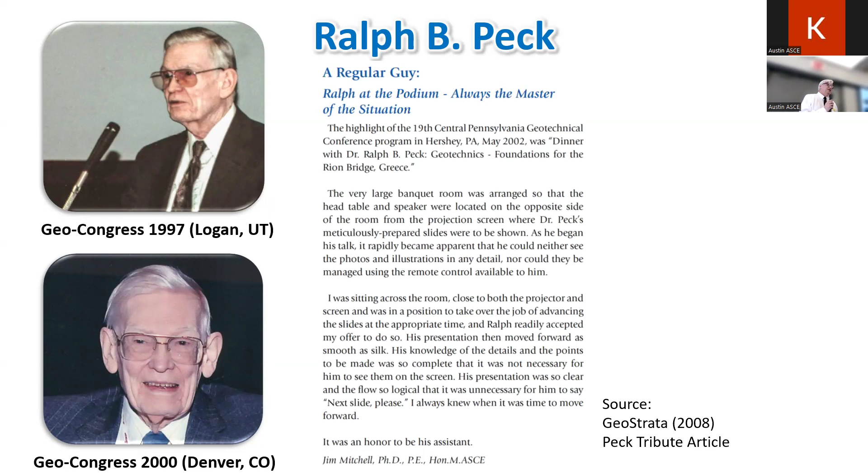In order to recognize Professor Peck, I thought that I would bring a recognition. I interacted with Professor Peck, but at conference level - I did not know him so much at the personal level. But there's someone else that I did know very well, who happened to be my Ph.D. advisor, and is another giant of the geotechnical profession - Professor Jim Mitchell.

I mentioned two events: 1997, which was my first Geo Congress, and 2000, a Congress in which I was somewhat an organizer. This is a different event I'm going to discuss - a 2002 event. I was not at that event, but Professor Mitchell was. Let me tell you what Professor Mitchell had to say about him.

A regular guy, Ralph at the podium, always the master of the situation. I'm reading it assuming that you cannot read it - the highlight of the 19th Central Pennsylvania Geotechnical Conference. That was an event as local as this, which is great, but it was in Central Pennsylvania - in Hershey. And the core of that event was dinner, actually dinner, not luncheon, with Ralph Peck.

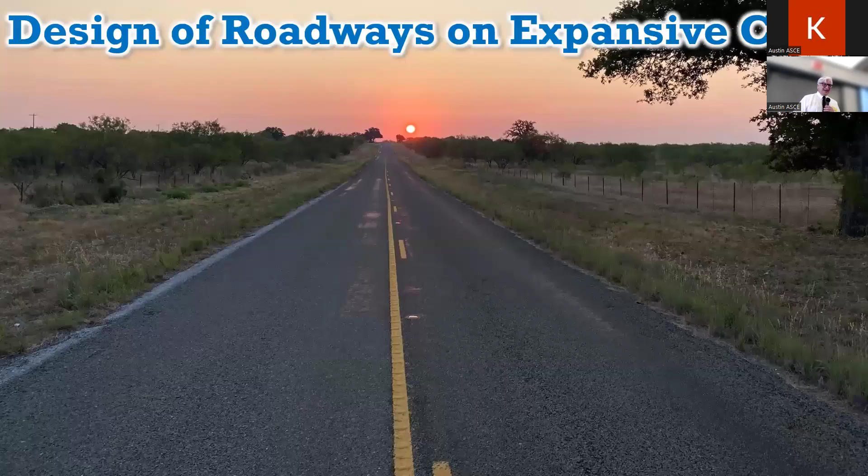And this is the most massive asset in the United States, public asset. We are talking about the total roadways in the US being 4.2 million miles. It's so significant that we may not have a sense of what this means. Just to have a sense, the circumference of the Earth around the equator is just 25,000 miles. So if you were to put all our roads one after the other and go around the equator, you will need to go 170 times in order to account for the massive asset that we need to build, maintain, and protect.

So it's a very massive asset, and any contribution that we can make to better the performance of this important asset will make a significant impact in our profession as civil engineers. So let me walk you through what we know very briefly about the direction that we're going in the design of roadways.

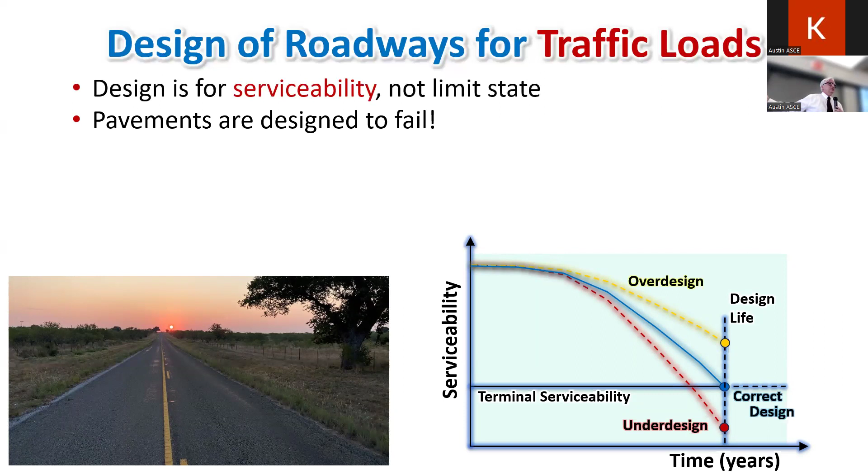For many years, and I'm not sure how many of you are familiar with the mechanistic empirical design, that's the direction in which we are moving in the design of roadways. But for a long time, this was such a complex problem that essentially we had to do a lot of empiricism to target this design. So let me tell you about the trend, the mechanistic empirical design, that is being implemented by AASHTO, and is being adopted by TxDOT.

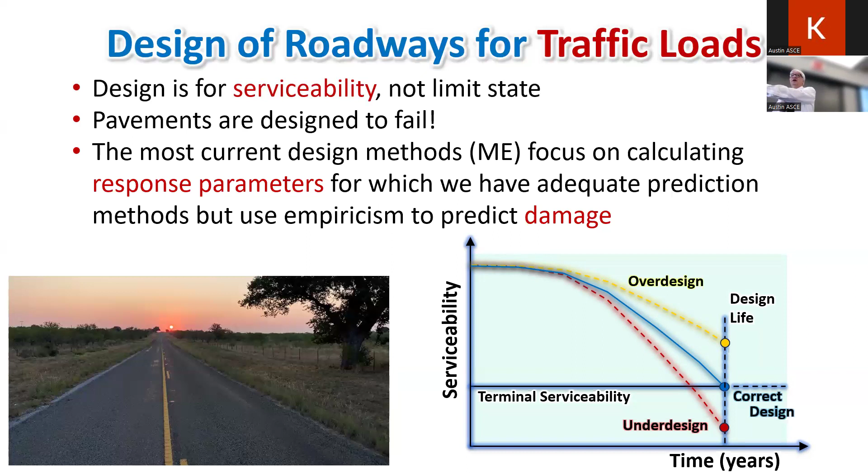The idea is the following: there are elements that we will not be able to predict, rutting is very difficult to predict, but there are elements that we can predict. We can predict stresses, we can predict some levels of deformation. So let's predict the parameters that we can predict, and then let's use empiricism, using certain thresholds on the stresses and deflections that we can calculate, as a threshold to calculate the distress, the damage. So that's the basis of the mechanistic empirical design.

So just to put it in a cartoon: you're going to have the traffic loads, these are repeated loads, these are cyclic loads, and we are going to define elements. There are some parameters, some responses that we can predict. We do not design for the tensile stress at the bottom of the asphaltic layer, but we can calculate that. We can calculate the compressive loads or the deflection at the top of the subgrade.

So with the elements that we can calculate, that's the mechanistic component of our design. Then that's when we come back with empiricism to translate, and this has a formal process that requires field data, called transfer functions. We use the transfer functions to transform that level of stresses beyond a certain threshold to a certain damage. And we're designing for damage. So ultimately, the accumulation of these responses, this damage accumulation, is what defines the distress. And this is what we do not want to see in a road.

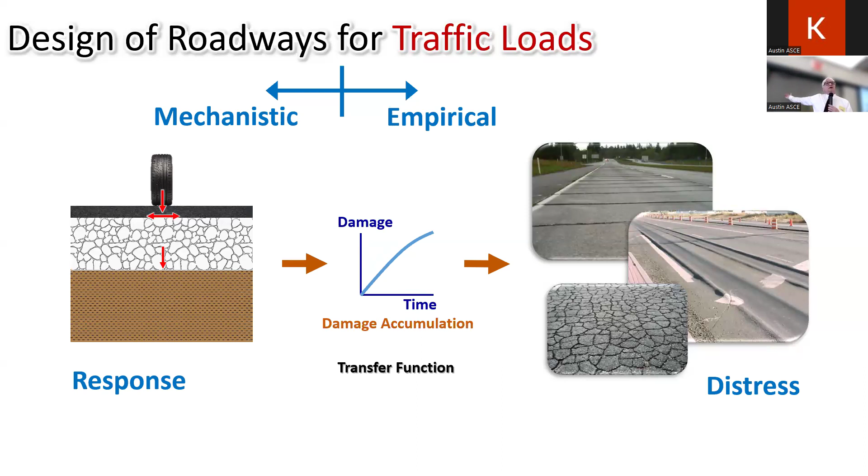And this is very hard to predict, but you can do a better job. So if we put reasonable thresholds on the stresses and deflections, we use that to empirically come up with the distress. Ultimately, we close the loop, and this distress, if we do a good job, is going to be used to recalibrate the design thresholds.

So it's a closed loop, and this is the basis for the mechanistic empirical design of roadways, which is not formally the observational method of Professor Peck, but I would contend that it has many of the elements of this observational approach. But that was traffic loads, and we know a lot about this, and we're moving in this direction.

What about environmental loads? In expansive clay, we're going to see that the distress we achieve may have nothing to do with traffic loads. This is a fingerprint of the failure by serviceability that occurs if my road is on expansive clay.

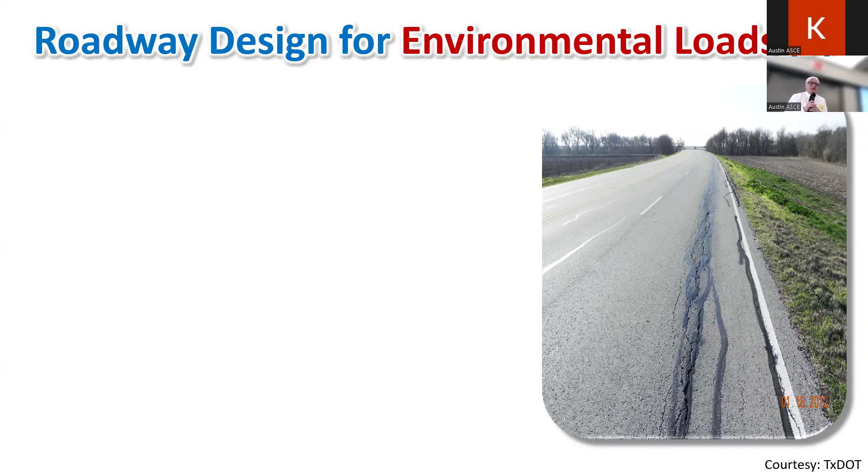If you drive here to East Austin, you're going to see a lot of this. And none of them have anything to do with traffic loads. These are different loads, and the current framework for designing roads doesn't help us. Here's another one. And here's another one.

So how do we design for this? Because this has nothing to do with my traffic. And for my roads, I know how to design for traffic. So we need something different.

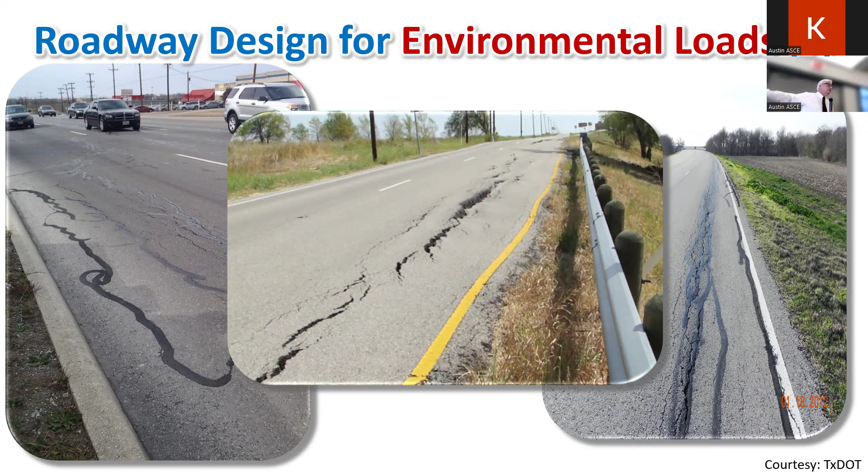So we do not have little trouble with this, we have a lot, even though it has taken a while for us to recognize it. This is a very old problem. We know about this. We have been dealing with this because a lot of the US has a significant fraction of expansive clay. We may not have known what is the cause of the distress, but we know.

Now it's too late to change our location, so now we need to handle it as it is. And we need to start by recognizing what is the mechanism by which these failures occur.

The original thinking was that, well, this is expansive clay cracking. So these humongous cracks are probably developing in the subgrade, and we do not see them, and they're longitudinal, and eventually they propagate to the surface. No, that's not what happens. We need to understand the mechanism in order to understand how to solve the problem.

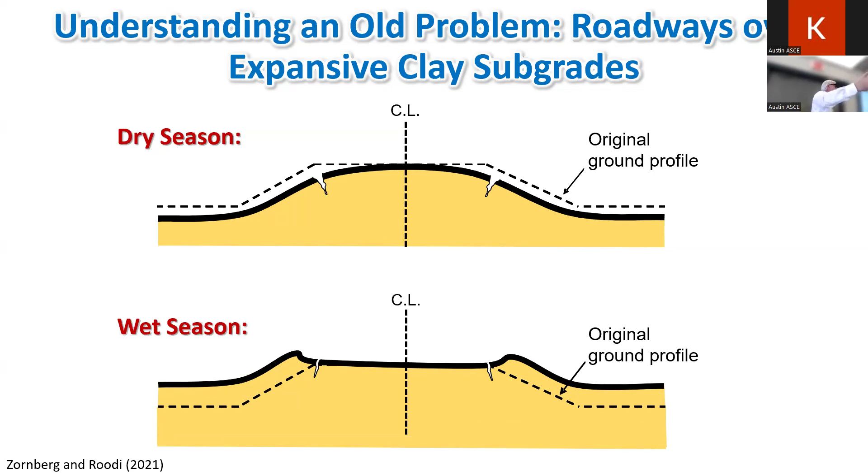During the wet season, the shoulders will heave in relation to this, and the cracks may even close. So it may have been a quarter of an inch and may become a tenth of an inch, but the crack is already there. And the problem is once the crack is there, water infiltrates and the degradation mechanisms have already started.

And if you don't believe it, because this was logical, but we didn't have data, so we collected data. This is Turnersville Road here in East Austin. You see the longitudinal cracks, and you can see the posts tilting, so this is currently rising. But if we go and measure - and some here in the audience may have even taken some measurements here.

So if we go and measure, not on any particular extreme date, this was okay. But it's often that we gradually see this when we go and measure the cross section from 2015 to 2018 - just the changes in elevation of the shoulders in relation to the center line. We're talking about, again, no particular extreme dry or wet event, just an inch or so. These are over 30 millimeters, just randomly measuring the relative elevation of the shoulders in relation to this, within the width of a single lane.

So now, this is just roadways, but this is not an exception. With data coming from insurance companies - this is mainly your window that doesn't close, or your door that doesn't open, or the crack in your ceiling - coming from insurance claims, the costs associated with expansive clays in the US exceed 15 billion dollars a year. This is not life-threatening, that's true, but it's more than any other geohazard - tornadoes, floodings, and earthquakes combined - on a yearly basis. This is a massive resource we need to cope with because we're not handling the expansive clay approach properly.

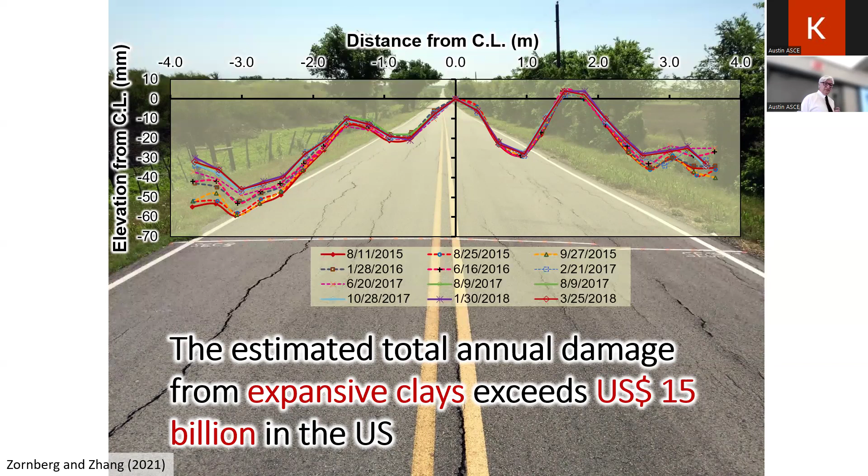If you don't believe me, this is not going to get any better. I don't have what happened in 2023, but I looked at data from NOAA, through the National Center for Environmental Information. They collect, on a yearly basis, the number of events whose damages exceed $1 billion. This is an infamous list - the list of $1 billion weather disasters every year. They have special considerations on the type of investigation for each disaster. This started in 1980, so they have 44 years of data, and the 6 represented here are the top 6.

Let's see where we are in 2023. We topped the chart of the last 43 years. We had 28 natural disasters whose cost exceeded $1 billion, and this is over 44 years. But I can see 2022 also makes the top 6, and 2021 is also there, and 2020 is also there. So out of the last 44 years, the last 4 or 5 years are the top 6.

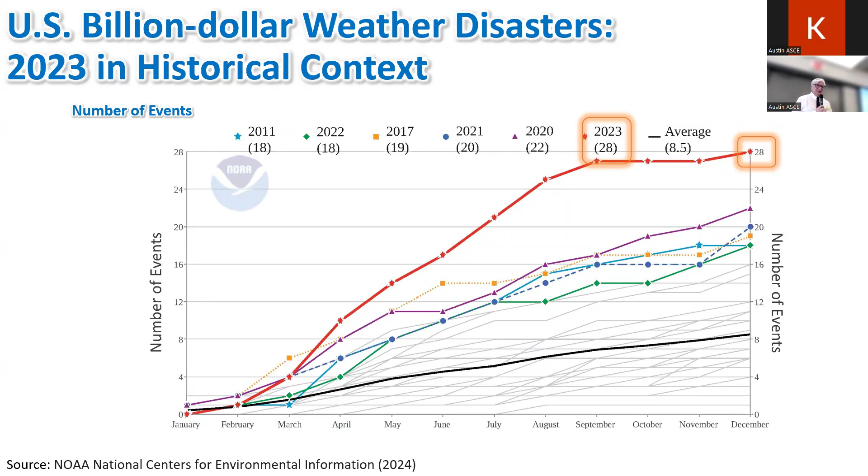So this is not telling me that we're going to get any better with weather-related disasters. Indeed, if you want to know, adding only the $1 billion disasters - the 28 events that each exceeded $1 billion - I think it's in the order of $81 billion for 2023. And again, this is data released last month. The worst one was the heat wave in 2023, $14.5 billion, and this doesn't include our roads, this doesn't include your home.

This is mainly disasters and costs associated mainly with agricultural and water issues. So this is not going to get any better. This is the list of water-related, drought-related disasters, and here is 2023, $14.5 billion. Again, this doesn't include our roads, but I thought this data would tell us that this is not going to get any better anytime soon.

So with this, the professor and I may ask you a couple of questions. Question one, and I may have given this away already: what mechanism is responsible for the distress in roadways on expansive clays?

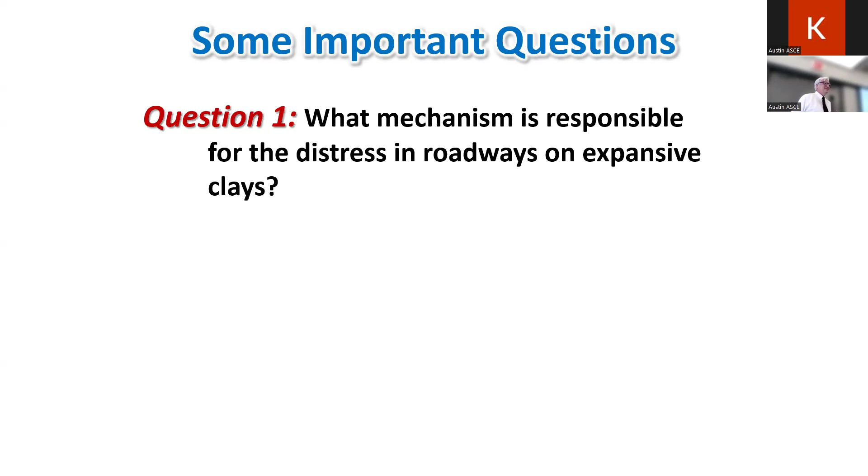Shrink swell, yes. Is it because there is a humongous crack in the subgrade that propagates to the top? No, correct. It is because there is a differential vertical movement caused by moisture fluctuations.

Okay, let me give you a second question. Are practical methods available for roadway design to characterize, not to solve, but to characterize expansive clay sites? I want to know if I have a problem with this site. Again, I haven't given this up yet, but what do you think based on your understanding? Do we have practical methods, or maybe just research, to identify where these $15 billion... how to characterize if we have a problem that will contribute to the next $15 billion a year?

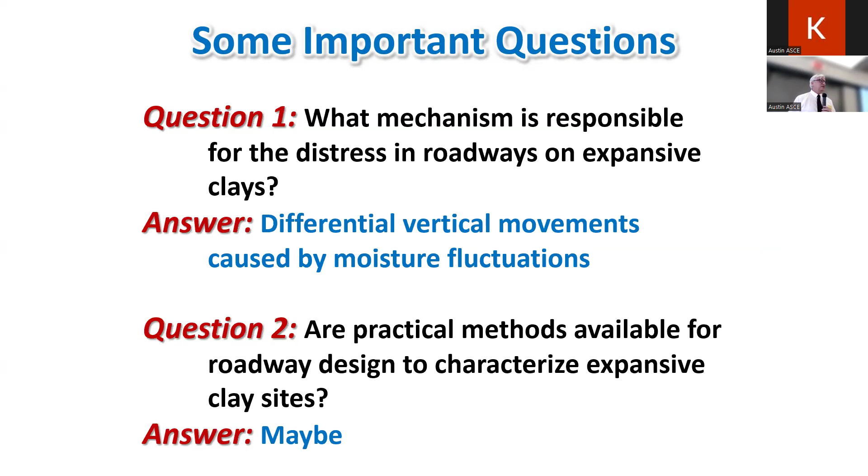What methods do it? Are you familiar with that? Which one? Texas PVR. I would contend that that's in the right direction. I'm going to give it a maybe, but I'm going to be hopeful, because that's going to be at the heart of what I'm going to tell you next. Yes, and the direction is Texas PVR, at least in that direction.

So let's start with characterizing the problem, and let me walk you through what we need to do to understand this problem of expansive clays. So really what's going on here, the culprit is the mineralogy of our clays. This is the Eagle Ford clay that we have from Dallas.

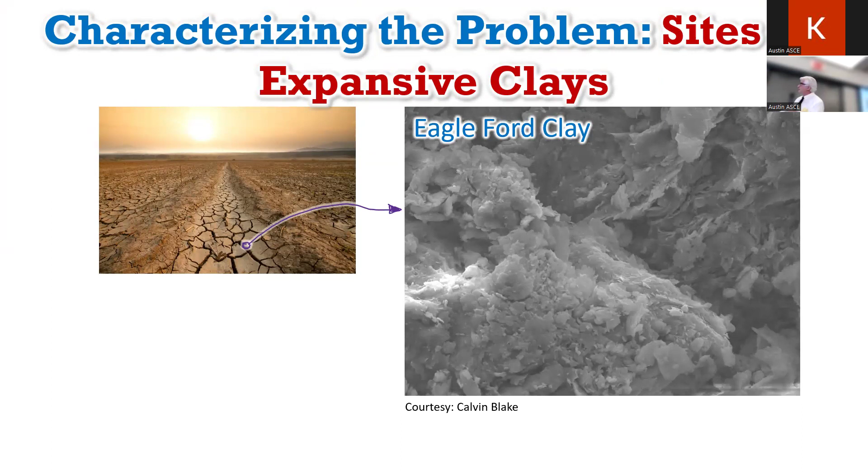And maybe it is a microscope image. Many would attribute the fact that this is an expansive clay because these are tiny particles, and that's partly true. But the real reason this is an expansive clay is because they are negatively charged. There is a geologic process called isomorphous substitution that makes these clays negatively charged. And actually, this electron microscope image doesn't do it justice, because it's very hard to get an electron microscope image of a clay with water.

We do not have the techniques, they're very difficult, but this is the gooey thing that you get when that clay gets water. And I'm going to try your memory, maybe if you get into grad school in geotech, there is an explanation for this, there is a theory for this. And this is the theory of the diffuse double layer. That's okay if you didn't get to that chapter in your undergrad, but this is the idea.

If this is a clay particle, it's negatively charged, and here we have pore water. The pore water is an electrolyte in equilibrium, with cations and anions that are in equilibrium with each other, but far away from this negatively charged surface. So what happens is that when our electrolyte gets closer to that surface, essentially the cations, the positively charged sodium, calcium, magnesium, will be attracted to this surface, and the anions will stay far away. And that's fine, this is what we call the diffuse double layer. There's a theory for that.

The problem is that not only does the diffuse double layer expand and develop when we have this negatively charged surface, but it also depends on the availability of water. If water evaporates, essentially we're not giving the opportunity for these cations to stay as far away from the clay surface as they want. And literally what we're doing is spring loading with water, essentially the surface right next to the clay.

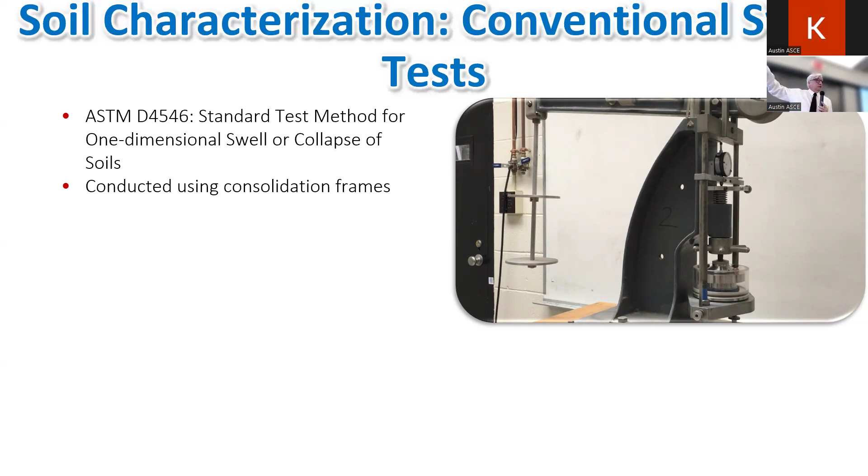We're going to start with an unsaturated soil, and we're going to add load, and we're going to measure how much it swells. We're going to measure the swelling potential for a given load, for a given confinement, we measure the swelling potential of the clay.

Are we doing this? We have the capabilities. It's an ASTM standard. Do we do it? Any one of these? Who mentioned PVR? Have you ever done this, a swelling test? You did? How do you use it? Well, we'll talk. But in my experience, it exists.

We don't do it. The reason that we do not do it is because it takes a long time, and it's very expensive. And if I'm going to characterize a new project, I need to do this with borings every 500 feet. Who's going to do this? So we don't do it.

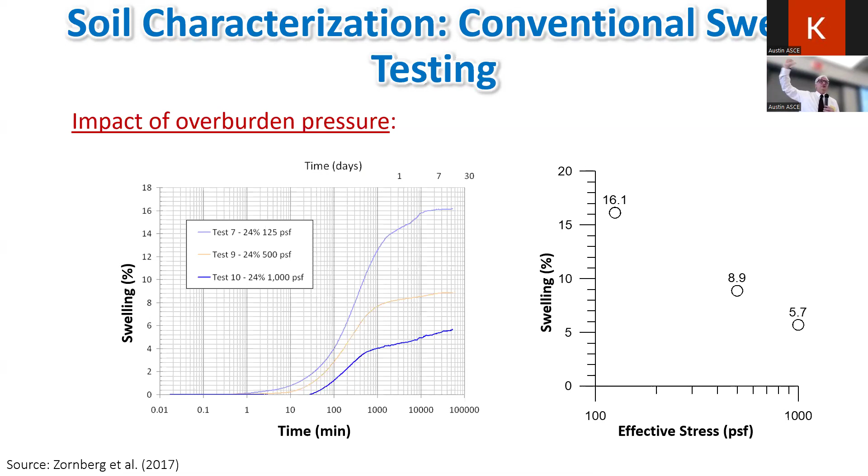The idea is that if we have a boring or a profile, let's say here is 2, 4, 6, 8 feet deep. Most of the action is going to take place close to the surface. So how much, if these top 2 feet go from the initial moisture content, let's say reasonably dry, to saturation, how much contribution, what is the potential rise?

I showed you data that shows the rise of the shoulders in relation to the center line. This is the potential, because not necessarily there's going to be a flood. So not necessarily we're going to take the soil in practice to saturation, but as a potential, as an index.

I like the term performance index. As a performance index, what is the potential that the top 2 feet can contribute? Let's measure. What is the potential that the second 2 feet can? Let's do this for the third 2 feet, and the fourth. For the same change in moisture, the bottom 2 feet contribute much less than the top 2 feet. That has to do with the confinement.

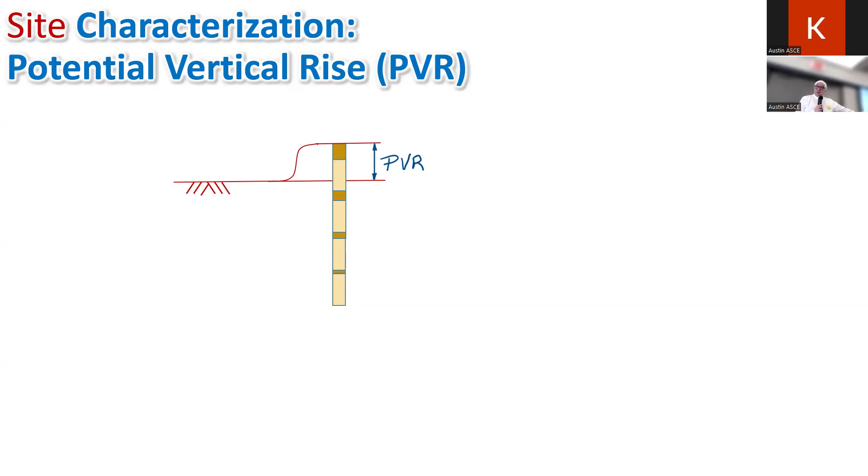And this is the PVR. What we measure is: if the soil profile is not one clay, but an entire profile, goes from a reasonably dry condition to saturation, how much is my ground going to lift? And that's the potential vertical rise, an important parameter.

And so here it is. This is the contribution of each one of the top 2 feet, the second 2 feet, the third, the fourth. We measure the swelling versus depth. Does this account for all variables? Not for all, but for many very important variables.

What is the area of this curve? Really, if we increase the number of these spaces, more, that's going to be the area of that curve, and that is my PVR.

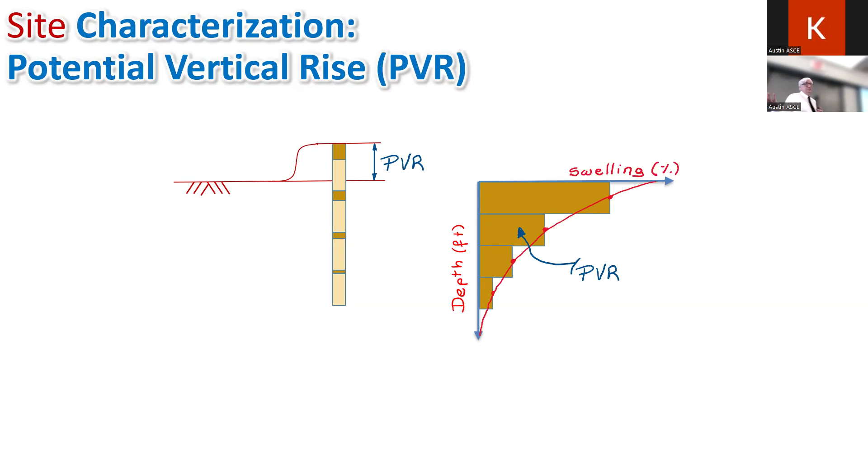But this is very relevant because it tells me a lot about the soil characteristics. It tells me a lot, I need to know the stratigraphy. It tells me a lot about the initial moisture content, I take that into consideration. I also take into consideration the very important impact of effective stresses, of the confinement, in getting this.

But it doesn't take into consideration everything. Most importantly, if we really rotate this, this is the swell stress curve that we just quoted. So really what the PVR is, because depth relates to confinement, mathematically or theoretically, is really the area under the swell stress curve. If we have that from the lab, we're done to calculate the PVR. We can do a good job calculating the PVR if we have the data.

This comes directly from the pavement design manual in TxDOT. It tells us this seems to be a right parameter. So let's design essentially what it says here, that our highways need to be designed to a PVR that doesn't exceed 1.5 inches. That doesn't mean 1.5 inches is going to occur. It means this is a good performance index that, as a design criterion, I shall not exceed.

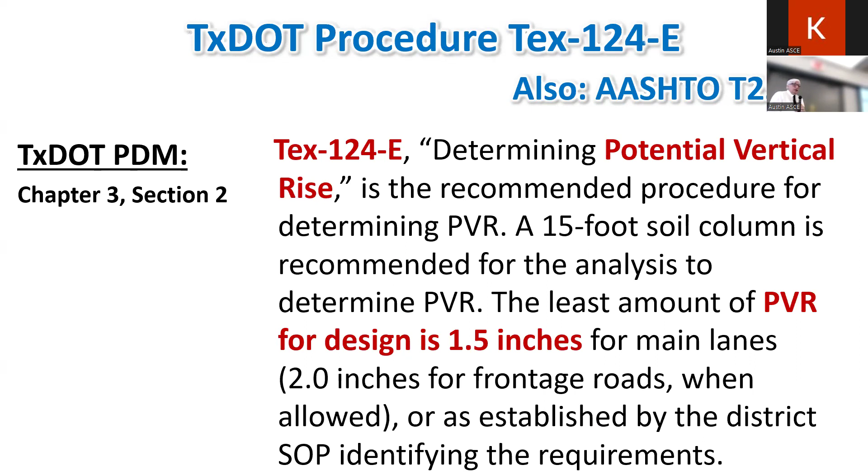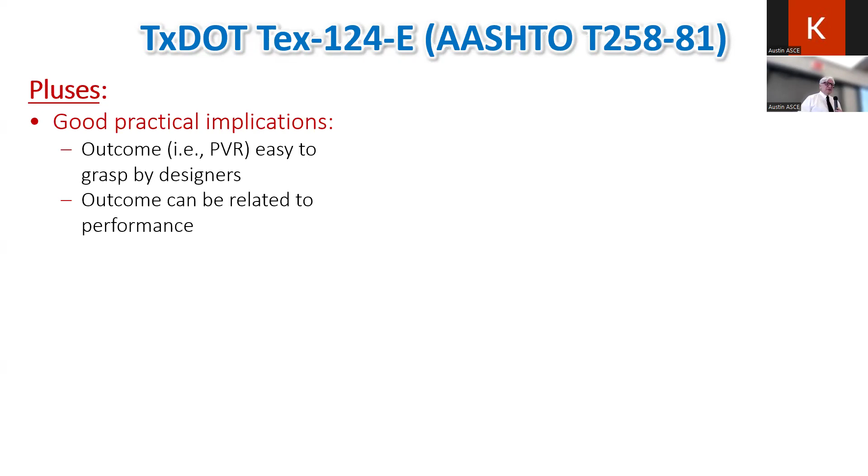All right, it sounds all good. There are many good reasons, and by the way, this was adopted by AASHTO, which is a very difficult thing to achieve. So there are very good reasons to endorse this PVR approach. The outcome is easy to understand, it can be related to performance, and it accounts for the right variables - not all the relevant variables, but many very important ones are accounted for in this PVR. But it has some problems.

The problem is that we didn't do the tests. Swelling tests were done in the 1960s. And when we realized that no one is going to continue doing these tests, we said, well, let's correlate the swelling, the PVR, to something that our engineers are going to do. And there came the plasticity index. But the plasticity index is not the PVR - the plasticity index is used to correlate with the PVR.

Oh, but we need 1, 2, 3, 4, 5 corrections. This is a very simple test, the simplest you can think of to characterize a clay, and you apply six corrections and you get to the PVR. So I'm going to contend that if you're familiar with the PVR as we use it today, you get this TxDOT spreadsheet, you plug in the numbers - the PI, the plasticity index - and you get the PVR. What you're getting is correlations with plasticity index from tests done in the 60s with corrections, and that's how you're going to make a multi-million-dollar decision.

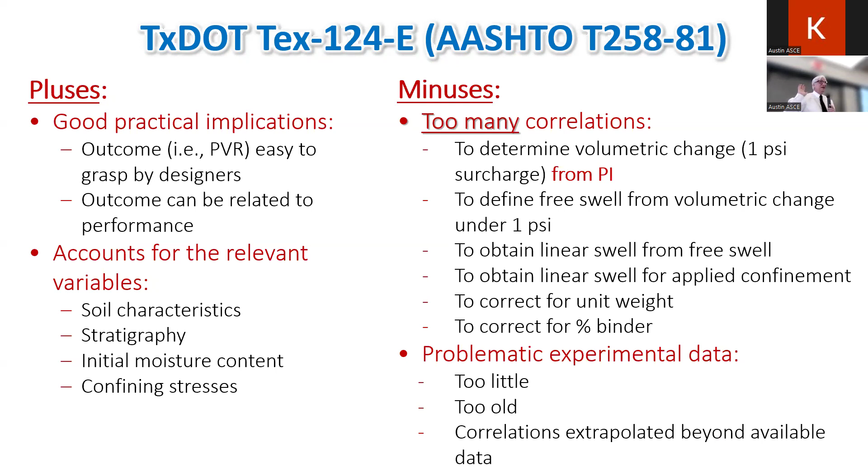Essentially, this is the data from the 1960s that correlates the volumetric swelling and shrinkage against the plasticity index. In order to get this, you need an initial moisture content, so that's why you see several curves, dry and wet. Many data points I have from the 60s - all this comes from some sites in San Antonio. To get the dry condition that you choose, it comes from like 10 points. How many for the wet? Six.

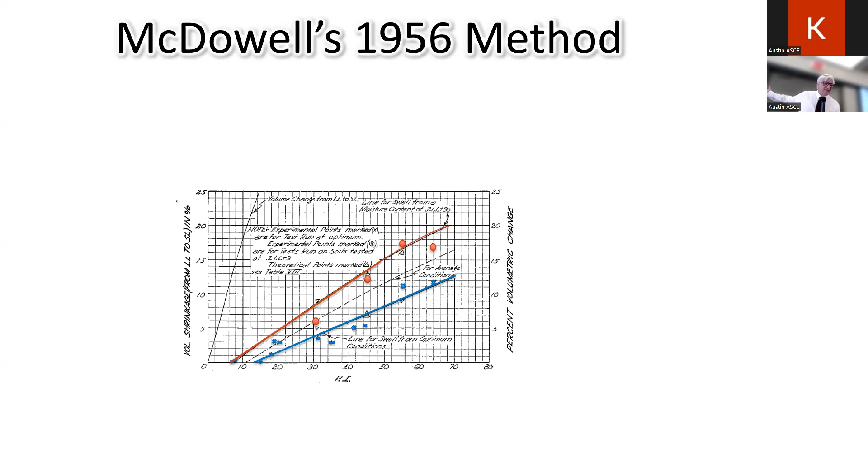That's how we are using it, and this is not all. This doesn't have confinement - this is for a 1 PSI confinement. But we really need PIs - here are PIs, we need more plasticity index that may increase. Oh, we do not have data, but we have already identified the trend. So this is where your spreadsheet is coming from. But that's not it.

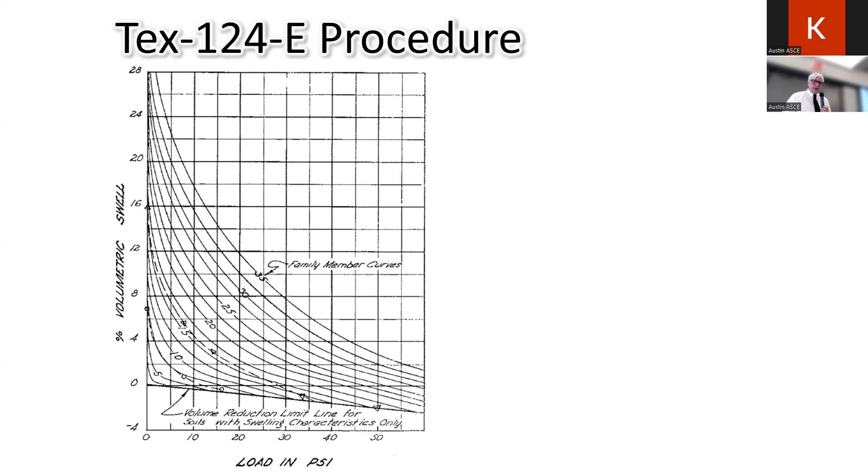Because this was for one PSI confinement, but we need this for different levels of confinement. So this is essentially the data collected - 1, 2, 3, 4, 5 data points - to get the entire set. Now we're talking about functions, not one number, an entire function that gives me the swelling versus confinement. That's where the data comes from. Really, the PVR equation uses it in a different way. This is what you get - they don't even show you the data because the data is very little to see.

So, good concept, relevant variables. But I wouldn't be surprised if you tell me you don't see much correlation between distress and the plasticity index, because this is a very simplistic initial evaluation with very little data. But the problem is real. To augment this database, well, we need a lot of time and money, and I'm going to do that for my product.

So that's when the research came about - reasonably recently, but I'm talking about now a decade ago.

We have been accelerating the swelling tests. If you do an infiltration test and want to accelerate the infiltration of water into your soil, recall how we do a hydraulic conductivity test. We put the specimen in a cell, and we need to test a clay. It will take a month to give me the hydraulic conductivity, and it may take a month to get the swell. So what you do is you accelerate it.

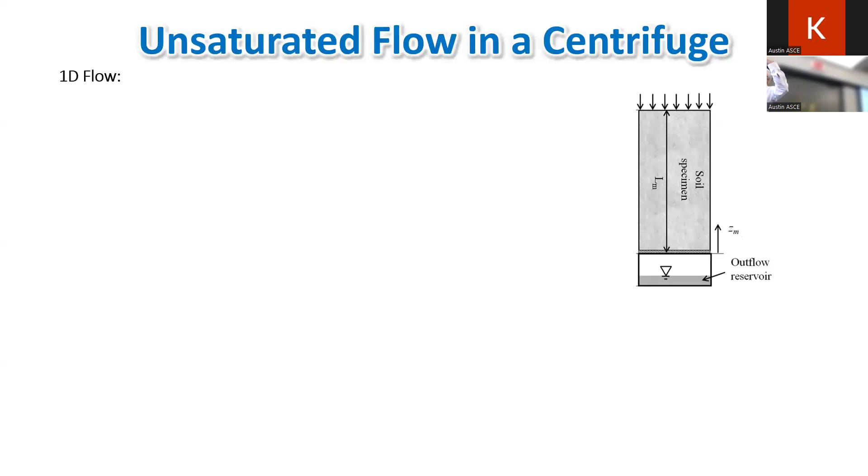The way you do it is you increase the gradient, the hydraulic gradient, by adding differential pressure. But that's doable with saturated clays, and that's what we do to measure the saturated hydraulic conductivity. It's much harder to do that infiltration, a gradient in pressure, in an unsaturated soil, because now the pressure is negative, it's suction. To put a gradient in negative pressure is very, very difficult.

Let me remind you what you learned the first time you saw Darcy's law. The hydraulic head has two components: the elevation head, Z, and the pressure head. Typically you would have seen U here; I'm putting it as psi to indicate that this pressure is negative. Under unsaturated conditions, there is water pressure, but that pressure is negative. What drives the flow is the gradient. This is energy, energy per unit weight, with units of length. What we really need is a gradient in hydraulic head.

If we derive the two components of the hydraulic head, it's 1 plus the gradient in psi. That's the hydraulic gradient, and we use Darcy's law. With Darcy's law we have the hydraulic conductivity, which in saturated conditions is a number, but in unsaturated conditions is a function. So here's the hydraulic conductivity times the gradient. In our testing on a saturated soil, we mess with this to increase the gradient, to get a test that would take 2 months to give us a data point in 1 day, hopefully. But under unsaturated conditions, we cannot. It's very hard to impose these gradients in psi.

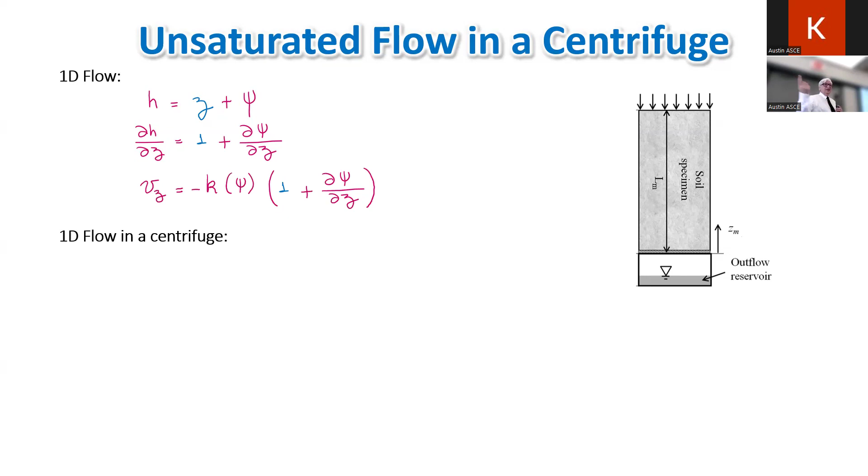So what about if we change this number 1? Can we change this? Yes, we can, because really this is a normalized potential energy. It comes from the gravitational energy that changes from one elevation to another, normalized into a difference in elevations. So if we put this permeameter in a centrifuge, we accelerate the number of gravities that we're subjecting it to.

So we can really change that number 1 to a number 10. We have 10 times acceleration, right? The acceleration corresponding to 10 times, to 50, to 100, maybe 500. So now we're talking - now we can accelerate the infiltration, and that's what we did at the University of Texas at Austin. We have a geotechnical centrifuge in which we can accelerate the flow process by increasing this gravitational potential.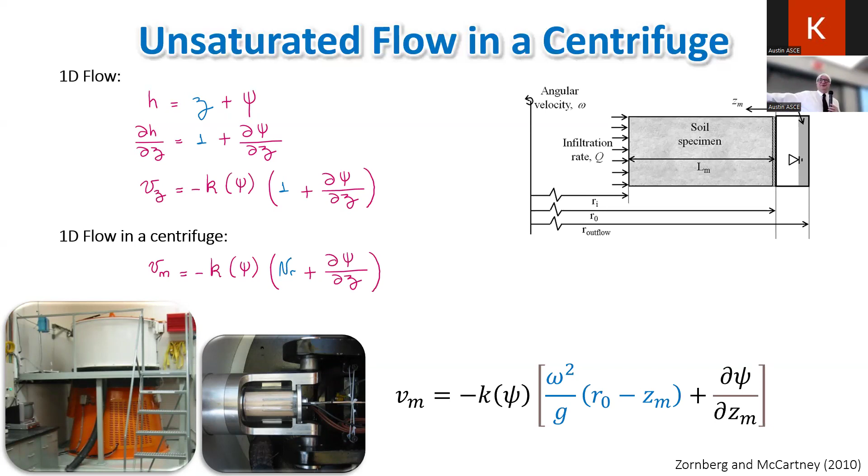At the end, Texas DOT was interested. We were very interested in modeling flow problems, but they said no, just give me the swelling. Well, if you want just the swelling, we can use equipment that is much simpler - essentially something like a medical centrifuge. I won't get into this, but the reason it was developed was to directly measure an important unsaturated property, something no one can measure otherwise. That's why in unsaturated flow we usually just guess what that function is - we don't measure it. But we can measure it in the centrifuge.

So Texas DOT said, well, you can also accelerate the infiltration that it takes to get the swelling. And for that we do not need this big centrifuge, we do not need to measure moisture, and we do not need to impose flux - we just need to measure volume changes. We can do that in a smaller centrifuge, and by the way, this one is the size of a washing machine.

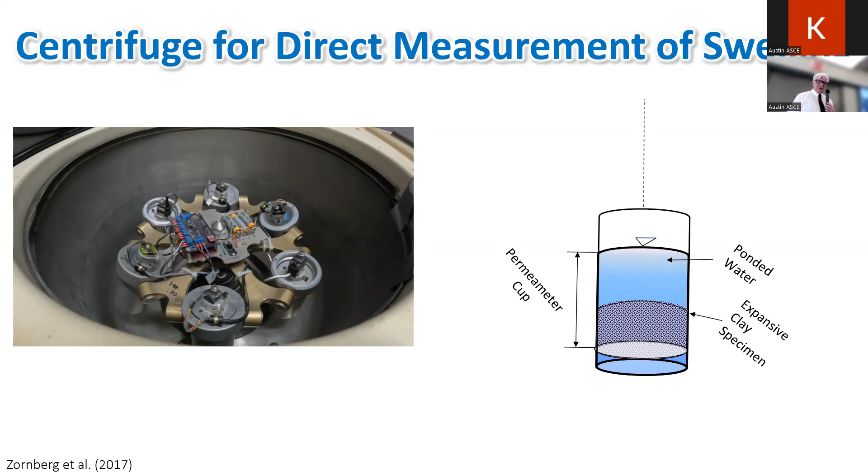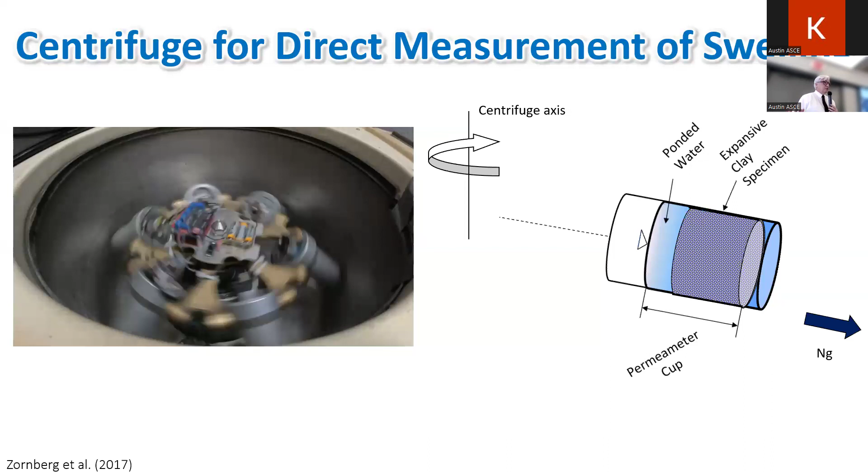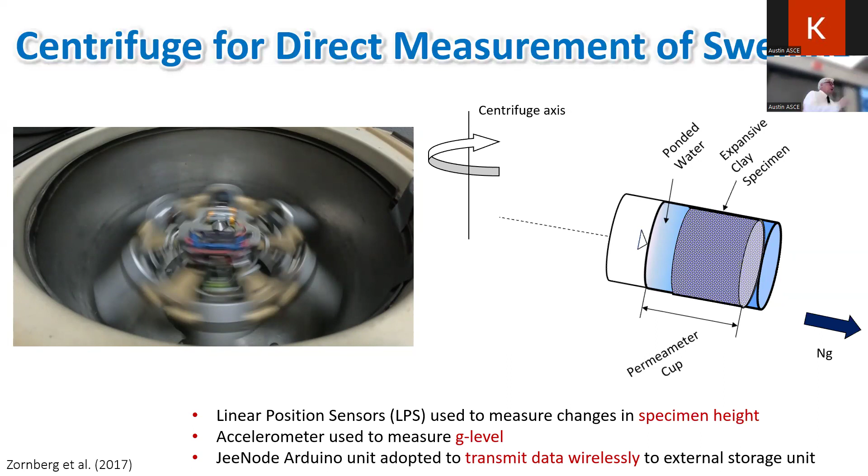Honestly, instead of one specimen at a time, we can do six, since this is used a lot in the medical business. So essentially what we do is accelerate the infiltration of water, and what we get is the specimen swelling, which we can measure. We measure the swelling with sensors, along with the G level. The big jump was when we were able to transmit this data wirelessly from a very high-speed spinning environment to our data collection system. And here it is - notice the color.

So here it is. In this case, we get 6 swelling versus time data points simultaneously, rapidly.

Essentially, this is the data that we would obtain for a given clay if we use the conventional swelling test method that exists. Here is after 5 days. But this is what we get in a centrifuge in the same 5 days.

And this is with an increased gravitational field, with 50 Gs, 50 times the acceleration of gravity. You can really appreciate this if we let the 1G test take place over, in this case, almost 2 months.

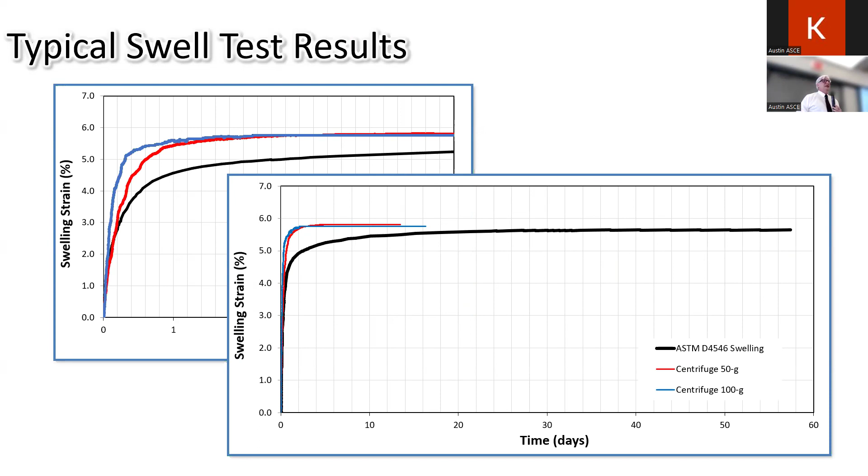So we ultimately get the swelling. Really what we want is this swelling, almost 6%. We want that 6%, but we get it in 24 hours rather than maybe 2 months. So the idea is that now we can get the data that was so hard to get in the 1960s when this concept was developed.

But what about the centrifuge data? Does it match the conventional swelling test that takes 3 months, not field data? Yes, here in blue is the centrifuge data. This is swell versus effective stress. Blue is centrifuge, red is conventional.

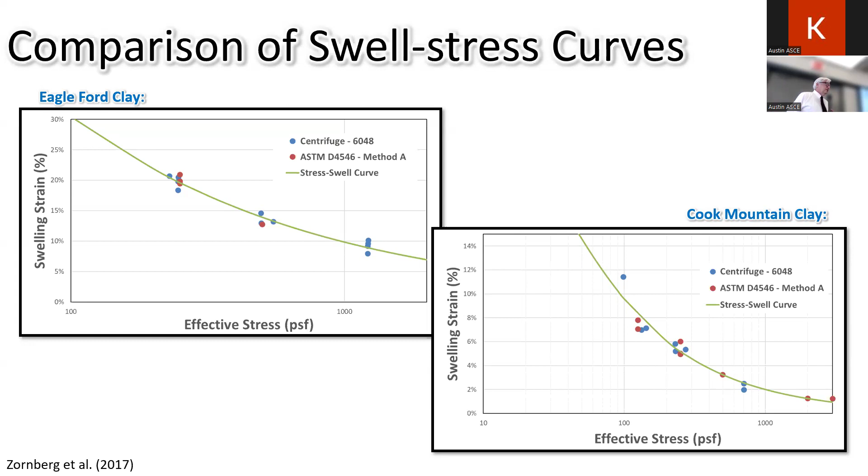And this is a different clay. So yes, the data, the swell stress curve that is ultimately what we want, matches the one that we would obtain using the conventional test. So we're happy.

The benefits of centrifuge testing is that now we can potentially get rid of just measuring the plasticity index to correlate to swelling, and instead measure swelling directly, if what we want is swelling. That's what this centrifuge approach can do: provide a direct measurement of the swelling. And the results could be, if we get the swell stress curve, literally the area under that curve is the PVR.

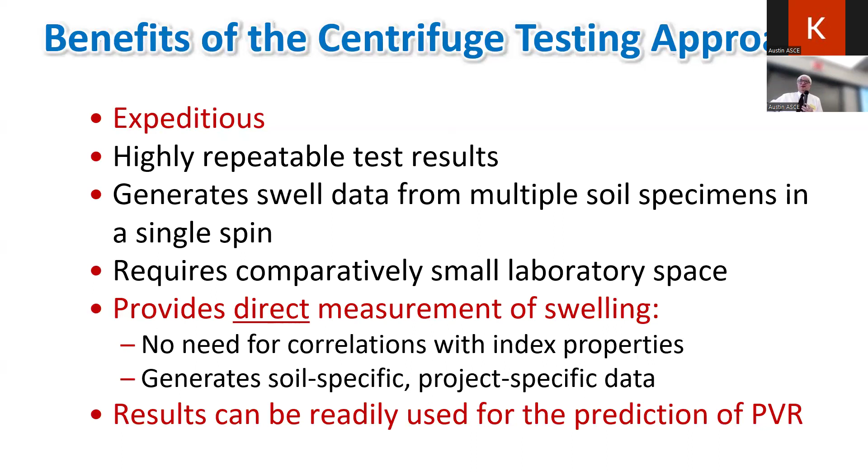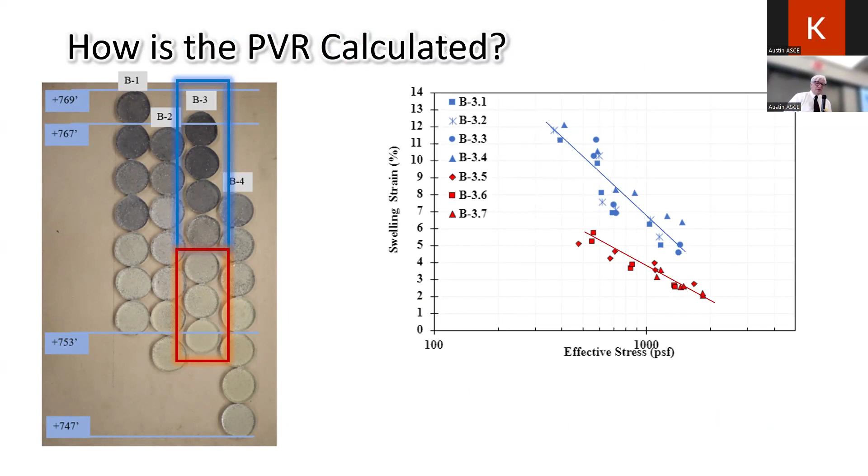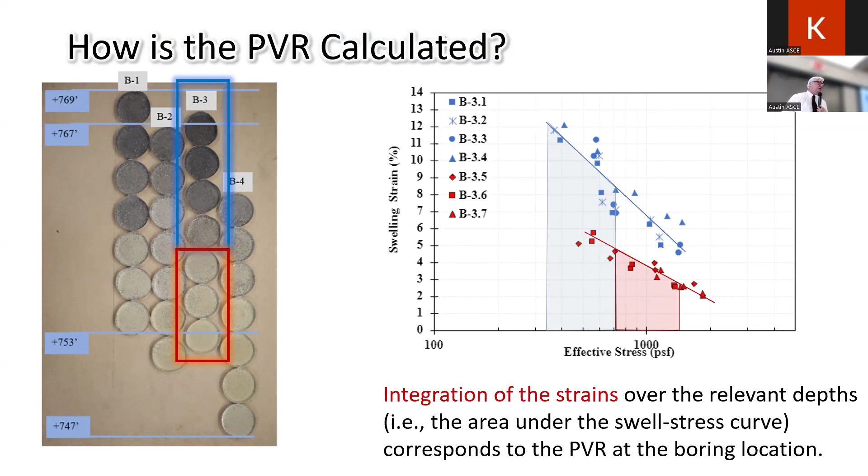So give me the confining pressures. Here the blue component goes from here to here, and the red component goes from here to here. The area under those two curves is how much I expect this site to swell once it goes from the initial moisture content to saturation. And this is your PVR. So we can get it.

So I walked you through question number 1, and question number 2 was, are there practical methods available? I'd say yes. The PVR already existed, but there were many questions—it was not reliable, it was too simplistic. Now we can do it, and it's still practical.

All right, how can we do the design? Now that we can get the PVR, what about this 1.5 inches design criterion in roadways—where is it coming from? I interviewed so many engineers in Texas, no one knows where it's coming from. But now we can get the data. If we can get the PVR reliably, we can correlate it to distress.

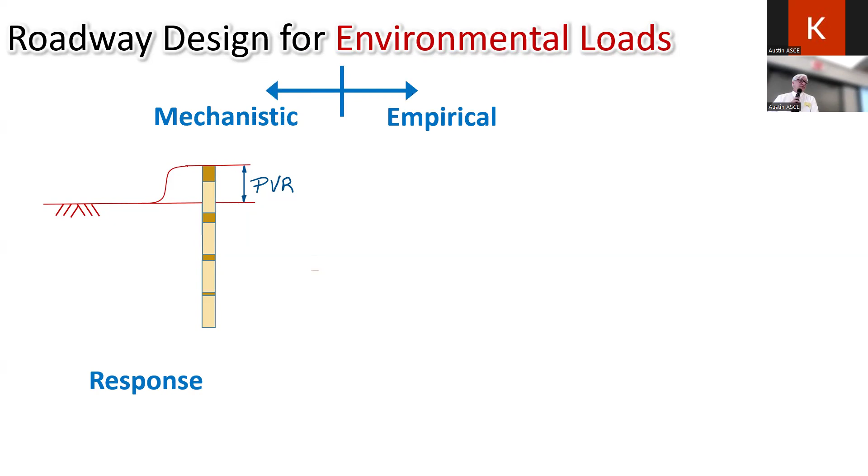This is different than the design for traffic loads, but it may follow the same philosophy. Let's calculate what we can calculate. The PVR is not a real prediction of the actual loss—for that we'd need weather conditions. It's an index, a performance measure. But let's get it, let's correlate it. I'll call that the mechanistic component, and let's correlate that to performance—in this case, longitudinal cracks. And this is, in a sense, back to the observational approach.

All right, now we know if we have a problem. But what if I have a problem? How do I solve this? That's a different story.

If I have a problem, this PVR would allow me to use, for example, lime stabilization. And I think that if we do it correctly, that's a good approach, but it may be too expensive.

My main concern with lime stabilization is that it's not forgiving for partial treatment. So if we do the analysis and conclude that we need to treat 3 feet of subgrade in order to kill the swell, and we do that, that's a good approach. But very often they say, I'm not going to excavate 3 feet and treat and replace, I'm going to do that with 6 inches. I'm going to treat the top 6 inches. Is better than nothing. And that's wrong.

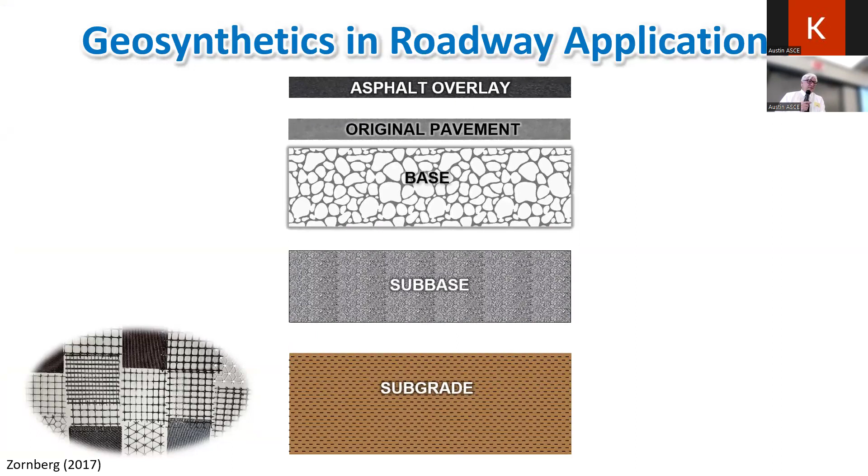Geosynthetics can be used. Are you familiar with geosynthetics? Okay, so geosynthetics can be used for many applications in roadways, and they can be used in many of the different layers of roadways. They can be used for separation, reinforcement, stiffening, filtration, barriers, and in-plane drainage. Many different opportunities to improve the road's performance.

But I'm going to take you to one more application, which is the use of geosynthetics to mitigate problems associated with the presence of expansive clays.

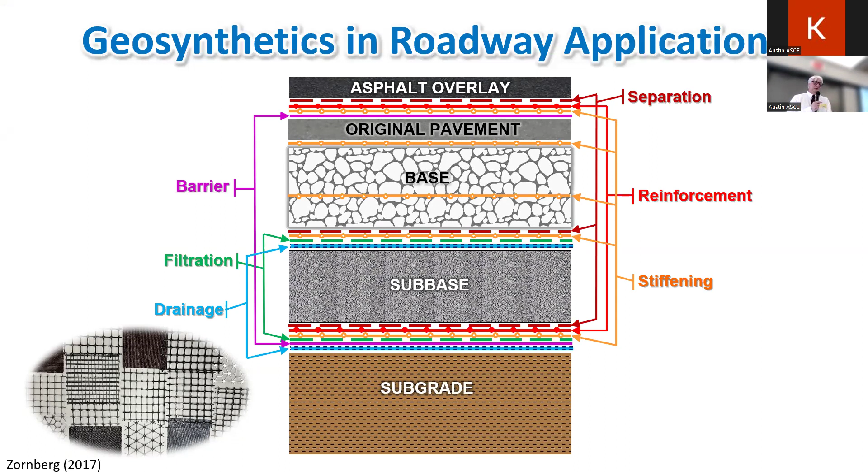There are different ways in which geosynthetics can be used and have been used. One could be to maintain the integrity of the system, remember we're delaying, retarding, avoiding the development of longitudinal cracks. Let's make our system ductile enough so that our cracks do not develop, that would be an alternative. The other would be to control the moisture, if we make the moisture uniform. Another would be to reinforce the asphaltic layer. Another would be to prevent moisture access. Many different ways in which geosynthetics could be used.

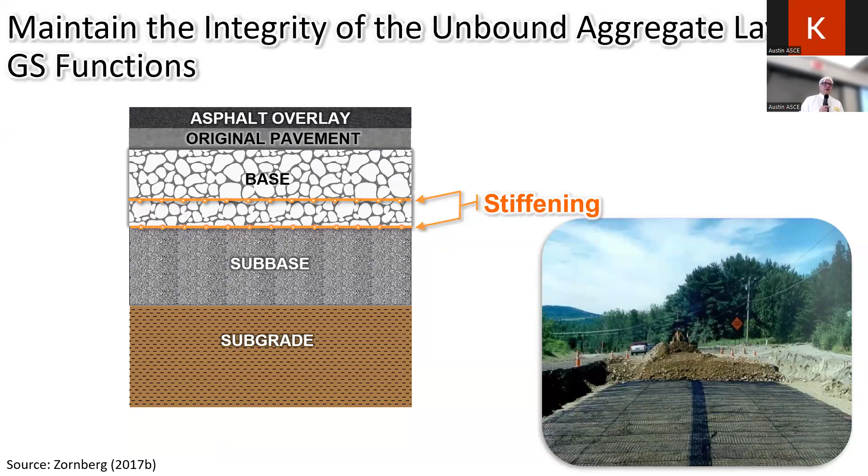But I'm going to focus on one, because from what I told you, we are not going to directly use the PVR to calculate this, we're going to use it to predict performance. And to predict performance, we need data. I'm going to focus on the first one, for many good reasons, but an important reason is that we have data. So essentially what I'm going to focus on is how to address this problem by using geosynthetics within the unbound aggregate layer. And I'm going to go much more quickly.

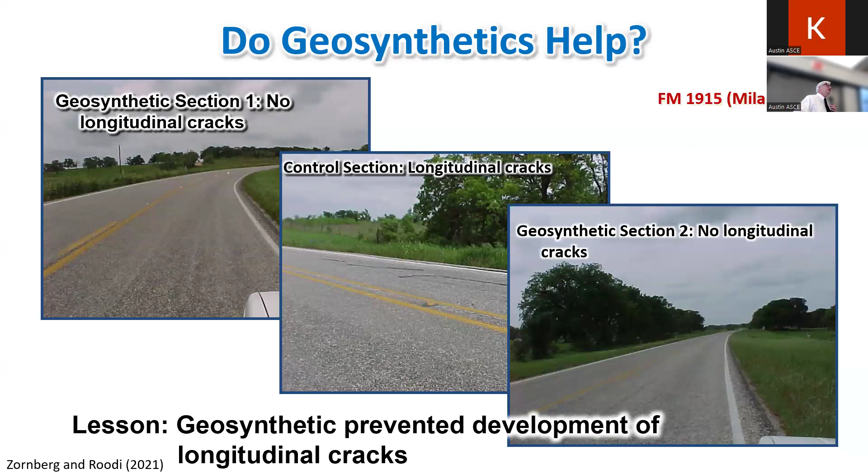So the lesson is the geosynthetics, at least in this particular case with test sections, and TxDOT is very good at creating test sections whenever a new method or new technology is being considered, did work. So we started working with TxDOT.

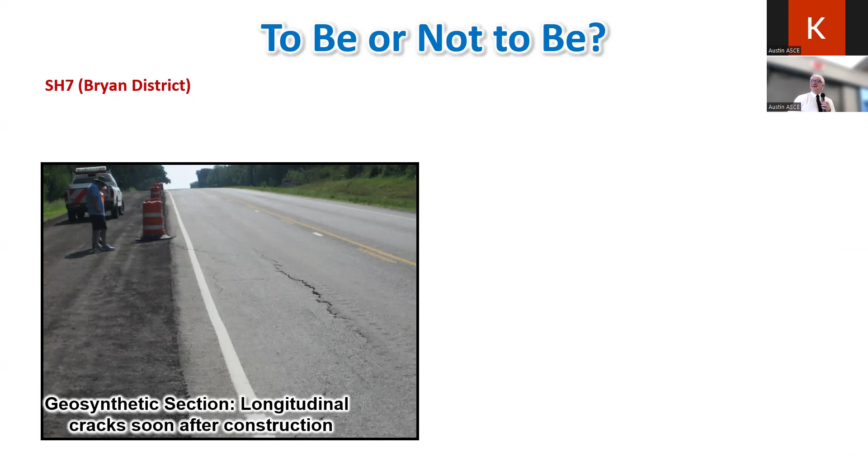And we got a call saying, we're building this new road, SH7 in Bryan District, and it's not even open to traffic, but I already see the longitudinal cracks, and we have the geogrids. Okay, we have a problem. So let's go and look at it, let's do a forensic evaluation. And I was far away, I was looking, everyone was laughing. What happens?

The geogrid was not the width that had been specified, it was 4 feet thinner, the roll was 4 feet shorter. So yes, there was a longitudinal crack exactly where the geogrid ended. It was very expensive because the contractor had to remove this and replace it. But this was an excellent field experiment because it demonstrated that the geogrids did work. So the lesson learned from here is that geogrids appear to work, but only if they exist. So don't ask the geogrid to work if they are not there.

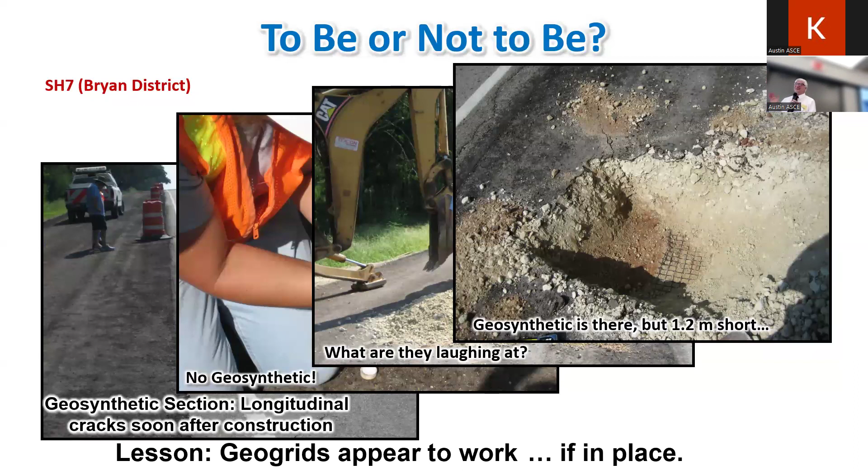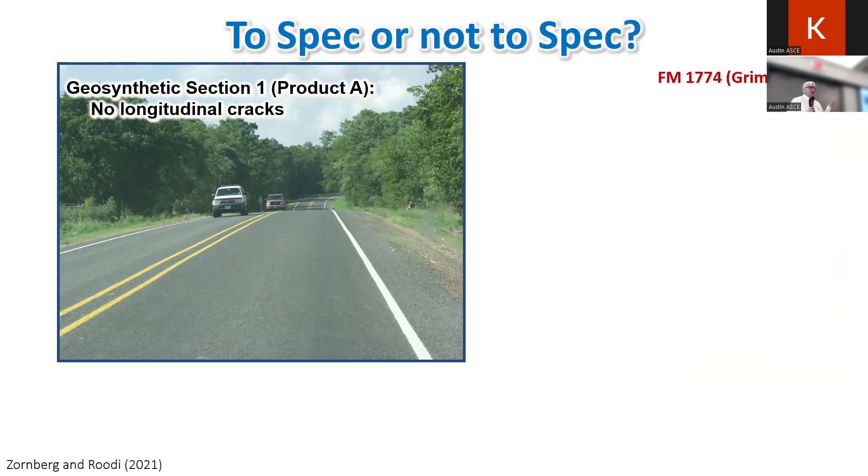But not everything was rosy. This was more than a decade ago. Here's a geogrid with a given test section, and another geogrid B that also met the specifications that existed at the time, and it did not work. So the specifications we had at the time were not necessarily suitable to identify which geogrids would work from those that would not.

Because of time, I'm going to tell you a very long story and make it very, very short. There's another question I want to answer: have geosynthetics been successfully used to prevent the development of longitudinal cracks? I hope you agree that I showed you at least some good evidence.

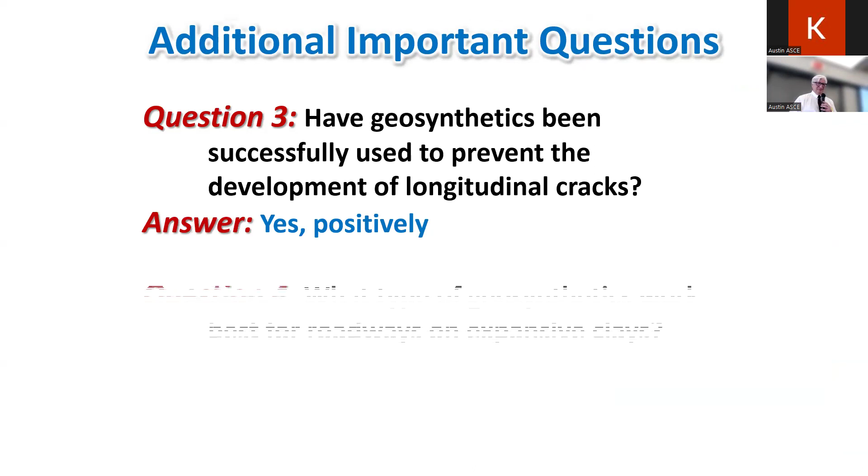Fourth question, and this is a tough one: what type of geosynthetics work best for roadways on expansive clays? It's a very good question, and I'm going to give an answer that as engineers you probably give very often. Well, it depends.

So it turns out that at the time, we were working on using geosynthetics for a different application, not the one I just discussed, but to increase the stiffness of the base layer. If we manage to increase the stiffness of the base layer, we can decrease the required thickness of that layer. That's a different application, I'm not going to get into that. I'll just tell you there was a parameter developed that measured the confined stiffness of the soil-geosynthetic composite. That's a mouthful, and I could spend more time on this.

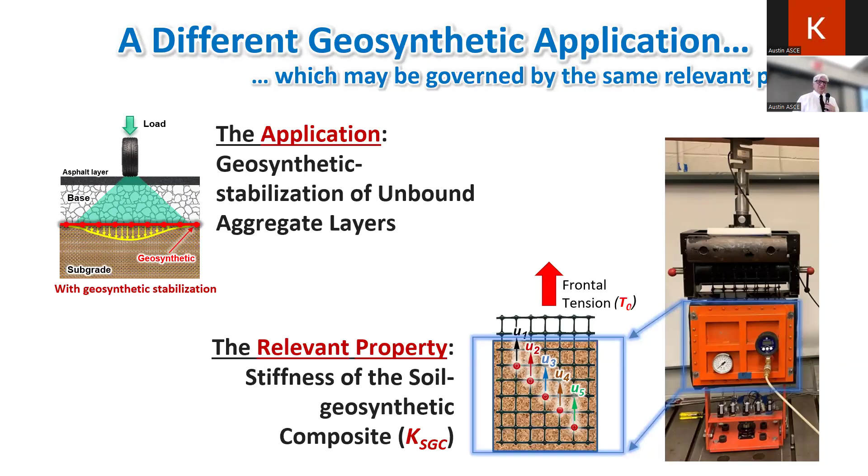But essentially what we're looking at is a measure of the interaction between the geosynthetic and the soil. So essentially what we're going to do is measure the confined stiffness, which is not trivial, and with that we get the parameter we want. I'm not going to show you this, but this is meant to be a video, and we learned a lot about this parameter.

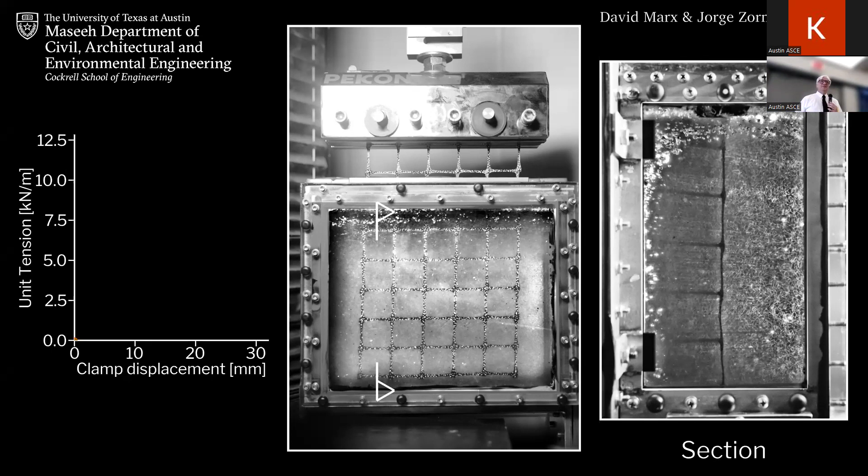What you're seeing here is a test with transparent walls and transparent soil. Trust me, it exists, I'm not going to show you because I'm running out of time, but we used transparent soil to learn about how this interaction works. I'm not going to walk you through that, but also this is a cross section - these are the particles we can see with this process using a laser plane essentially on transparency, and we can measure how this interaction works.

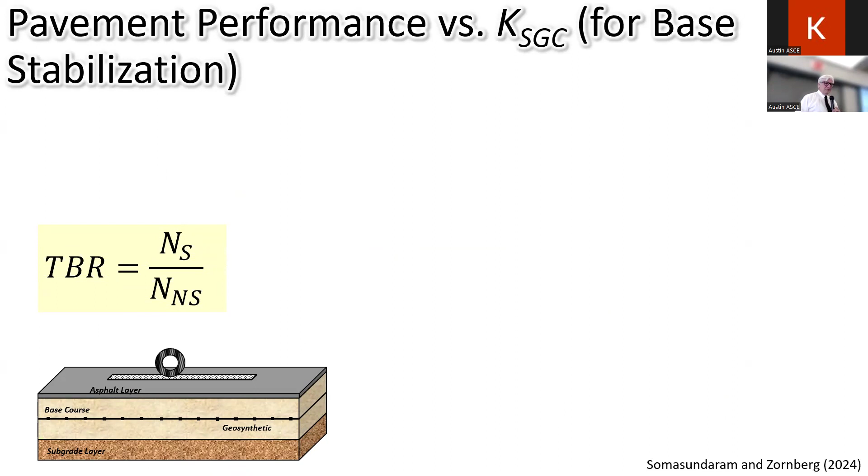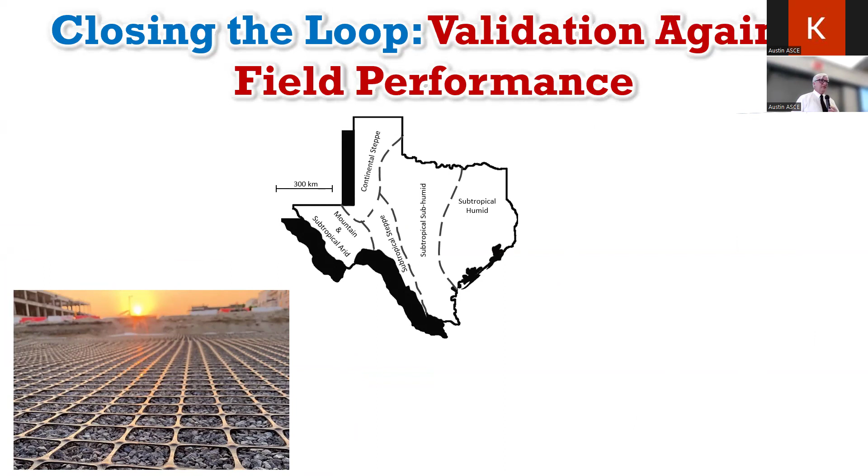But I can go to the field and measure what happens when we use geosynthetics there. TxDOT has many different sites that we can go back to, to evaluate how these test sections have performed over the years. I'm not going to show you because I don't have time, but in the long version of this presentation I show data from 6 different sites.

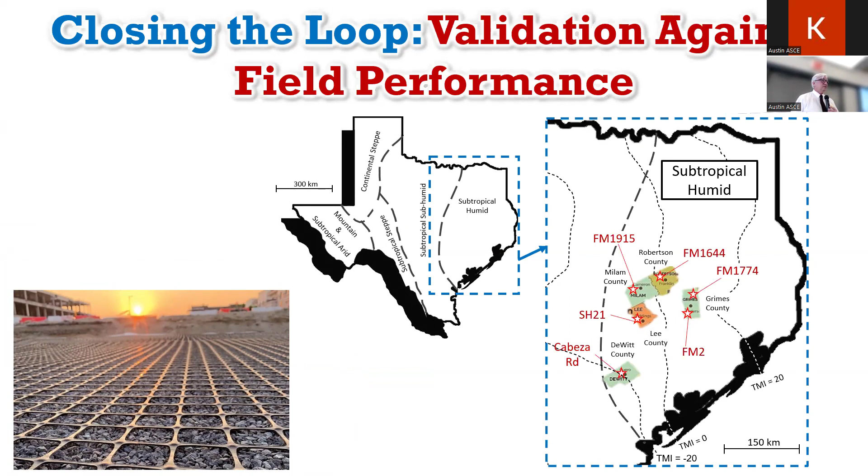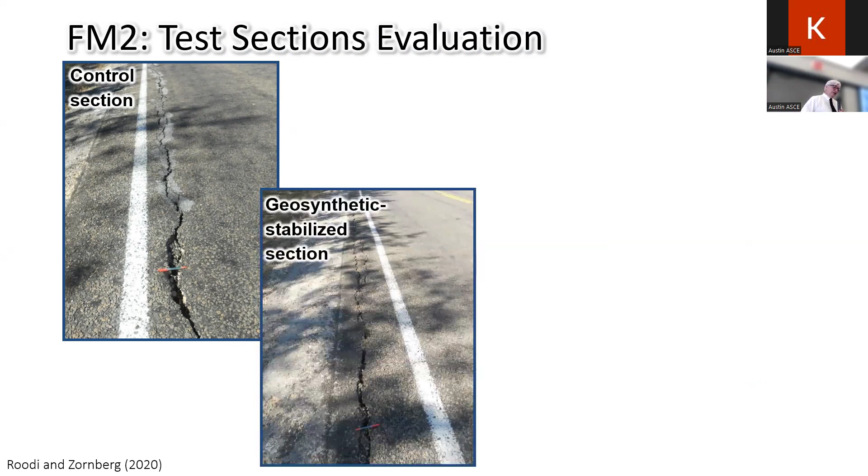This is FM2 in Bryan District, and essentially what we can get after evaluating the different cross sections, some with and some without geogrids, is a measure of the longitudinal cracks - the length of the longitudinal cracks in test sections with or without lime, with or without geosynthetic, and geosynthetic 1, 2, and 3. These are some images, essentially another field validation confirming that the longitudinal cracks develop from the bottom up.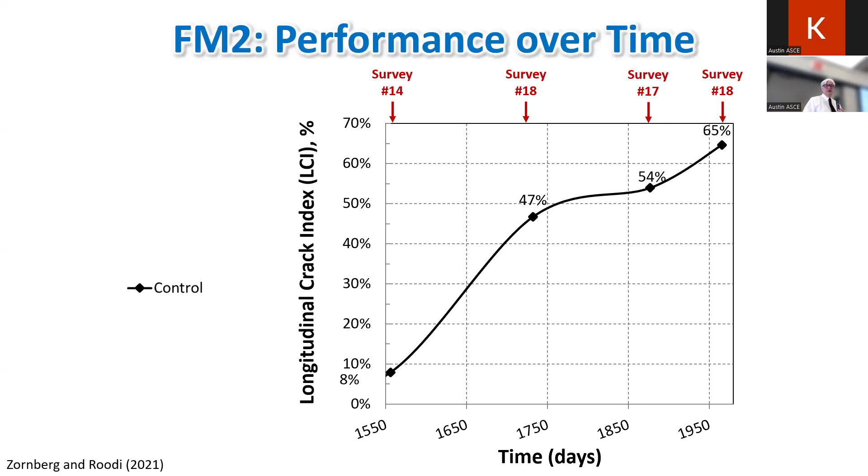What about the one with the geosynthetics? We have 4 repeats for each one of these test sections. Well, definitely it's not 0. This is what we now call geosynthetic type 1. Now we have a better one, type 2, and a better one, type 3. Yes, it did statistically significantly better.

Without the geosynthetic, what about lime stabilization? The lime stabilization was incomplete, so let me clarify that. Not much better.

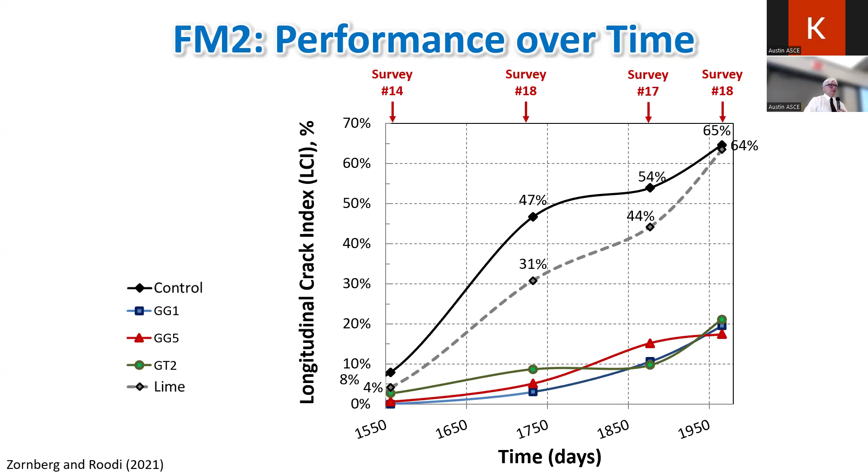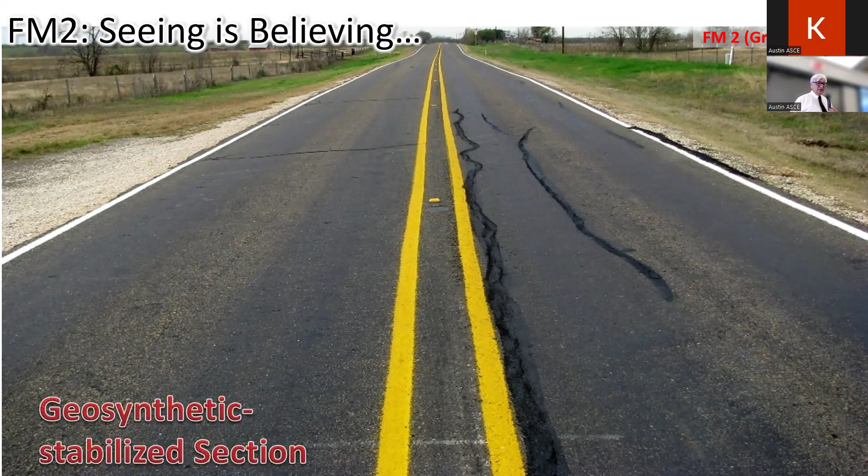So what we can do out of this, seeing is believing, so nothing better than a good picture. Here on your right is the control section without geosynthetics. On your left, same soil, same traffic, same weather conditions, same drainage conditions. No geosynthetics, with geosynthetics. So this is the stabilized section, and this is the control section.

So ultimately from here, we can get to what, from the performance point of view, can be considered acceptable and what cannot. And it correlates well with the KSGC parameter that we have developed. By the way, the performance of the three geosynthetics was reasonably similar, and the KSGC was reasonably similar. And the control sections, and actually the lime stabilized section, was not.

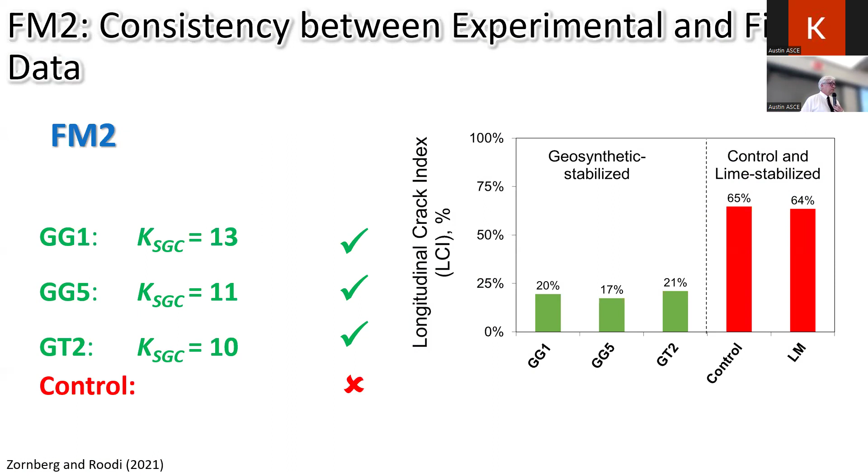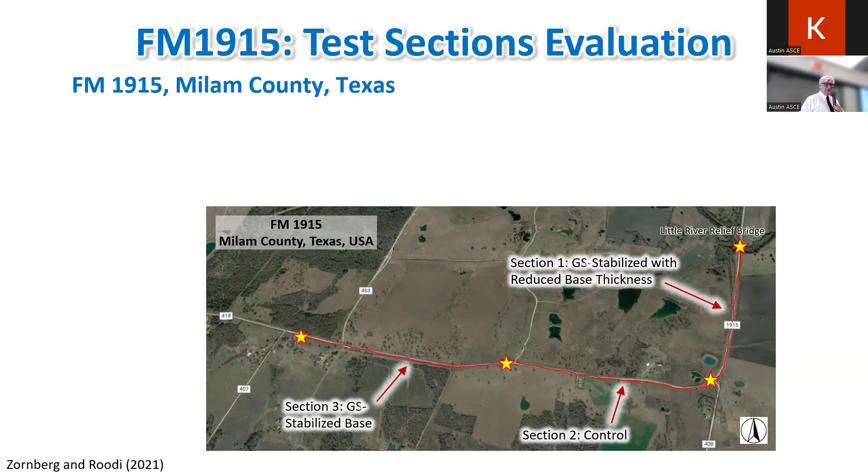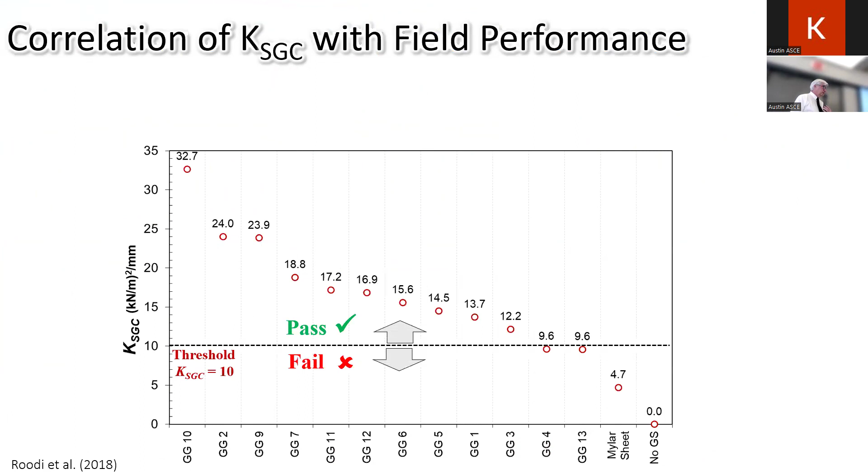All right, I have many other sites that I could show you, and I'm not, but I can give you reports to show you that. But this is the last site that I had, in which there were geosynthetics that did work and geosynthetics that did not work. But ultimately, we can get into how to correlate now with field performance, the KSGC against different geosynthetics. And essentially, and this is subjective, but it's with input from TxDOT, what was the value considered acceptable, what is not. This is mainly for specifications, to write a specification.

So with this, I'm back to my questions. I had already discussed number 1. Question number 4, what geosynthetics work best? I would say those with high stiffness of the composite.

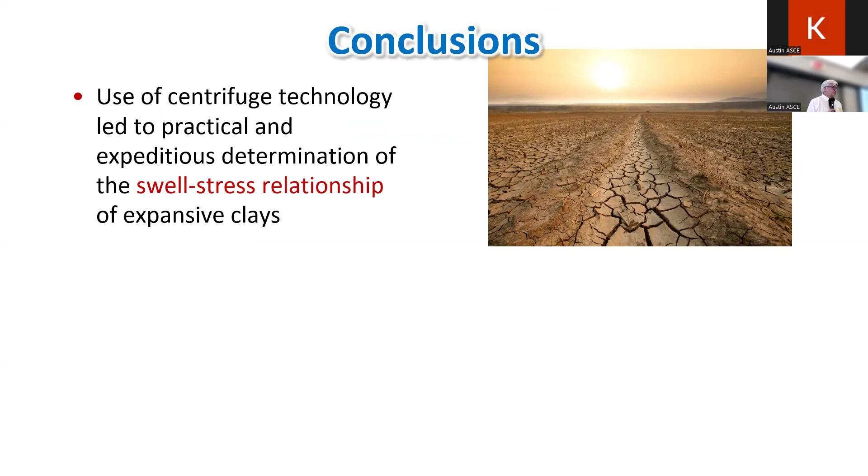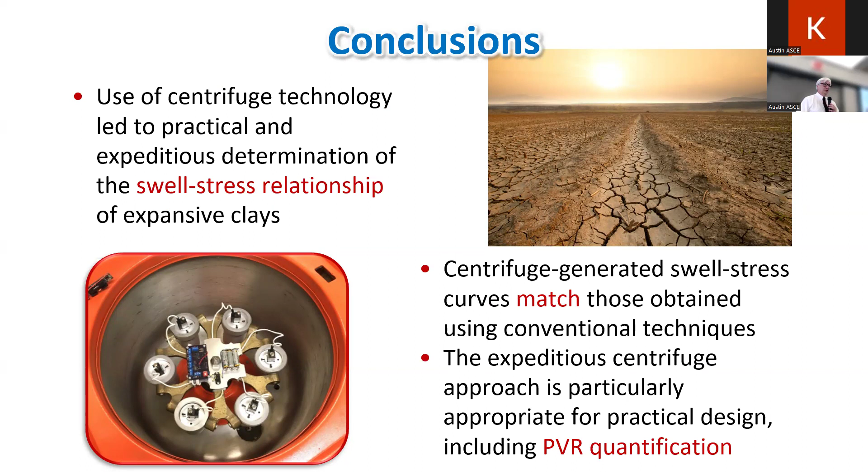So to summarize, I can leave you with some simple takeaways from this presentation. The use of centrifuge technology led to practical and expeditious determination of the swell-stress relationship, which is what we need to use the PVR. This matches the results with conventional tests that take much longer to obtain. And this approach is particularly suitable if what you are looking for is to calculate or predict the PVR. That's in relation to if you have a problem.

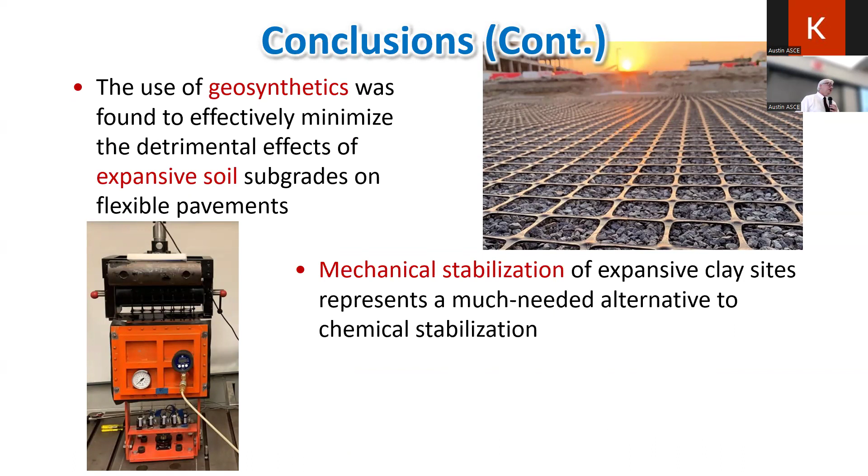If you do, then you have options. One would be lime stabilization, which I didn't focus on, but it's an option. The other is the use of geosynthetics that was found to effectively minimize the problems associated with the presence of expansive clays. Not only that, but this represents a much needed alternative to chemical stabilization. So now we have mechanical stabilization or chemical stabilization to address the problem associated with expansive clays.

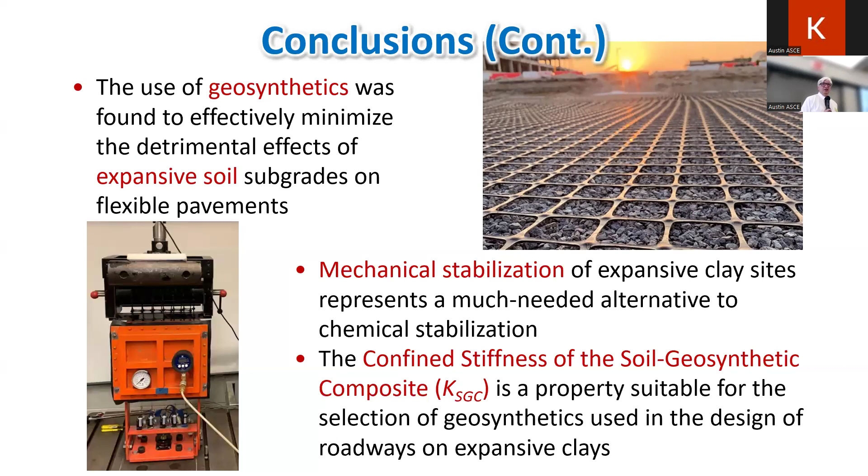And at least one parameter, may not be the only one, but at least one parameter was identified to correlate, to differentiate the performance that is expected from different geosynthetic products.

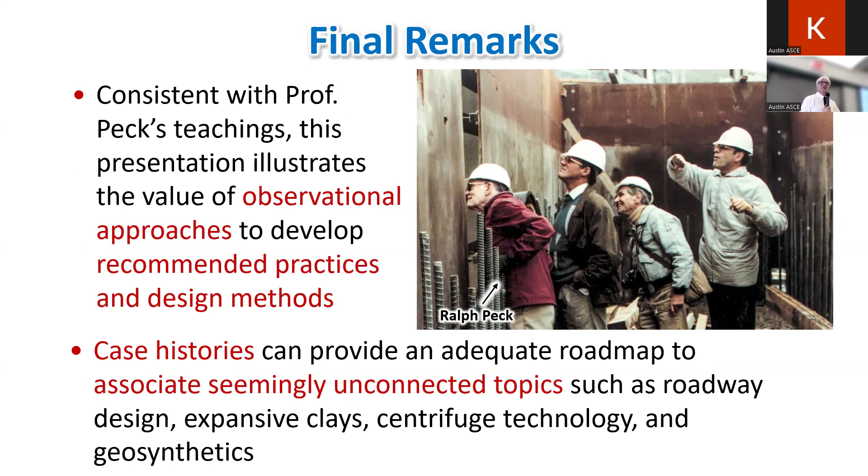And final remarks, and this is more holistic, honoring Professor Peck, the observational approach. It was not formally what I showed you, but we went to the field, got feedback from the field, and defined thresholds of a parameter to make use in design, in future design. And with the use of case histories, I showed you some, we can put together many different concepts, such as, in this case, expansive clays and roadway design and centrifuge testing and geosynthetics.

Thank you very much.